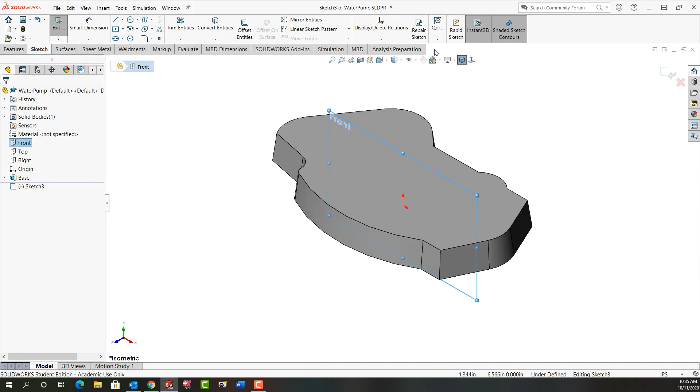The next step in the creation of our water pump is to make a revolved inlet in the front plane. So I'm going to select the front plane, tell it I want to make a revolve, and look normal to it. I'll use my mouse gesture to activate Smart Dimension, and sketch the basic shape.

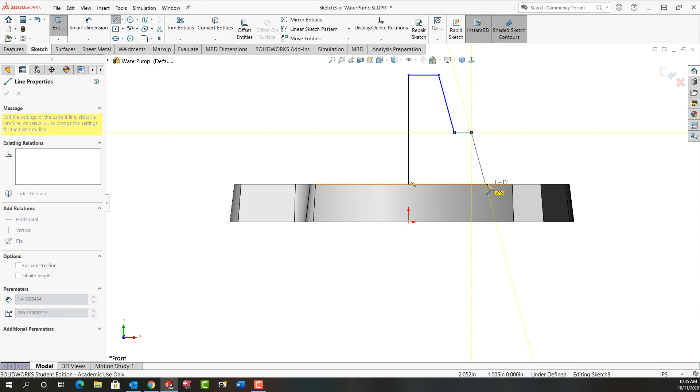I do want this parallel relationship to the other angled line, so I'll click to accept that. I'll close off my shape and press Escape, then activate Smart Dimension. First, I'll add the angle. Then I'm going to add the 1.5 inch dimensions. Then I'll push Escape again.

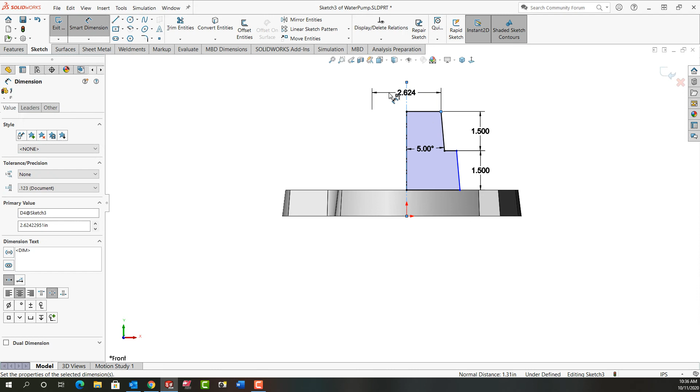I'm going to zoom out a bit, and I want to add a center line. So I'll turn on my center line, push Escape, so I can use the diameter dimensioning. Once again, I'll use mouse gestures to activate dimension. Select that endpoint, the center line. Remember, here's half, here's the diameter. Move past the center line, click to place it, and enter my 1 3/4 diameter.

And I'll do the same thing down here. This is 3 inches. My sketch is fully defined. I'll push Escape, right click, and exit the sketch.

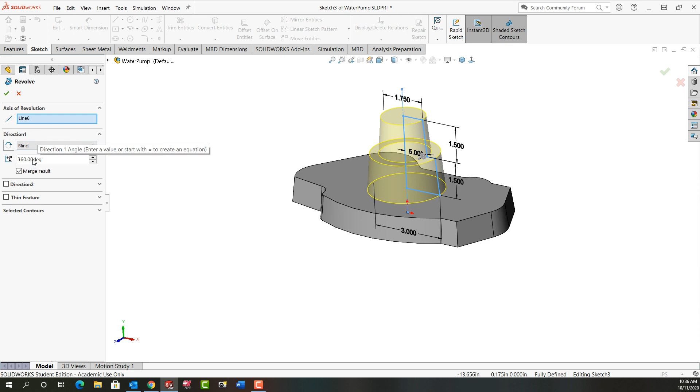I'm going to rotate around a bit. Because there's only one center line, it uses that as the axis of revolution by default. If that's not correct, I'll just clear this selection and select the proper line. I do want a 360-degree revolved feature with the result merge, so I'll say OK to accept that.

And we'll continue from there in the next video.